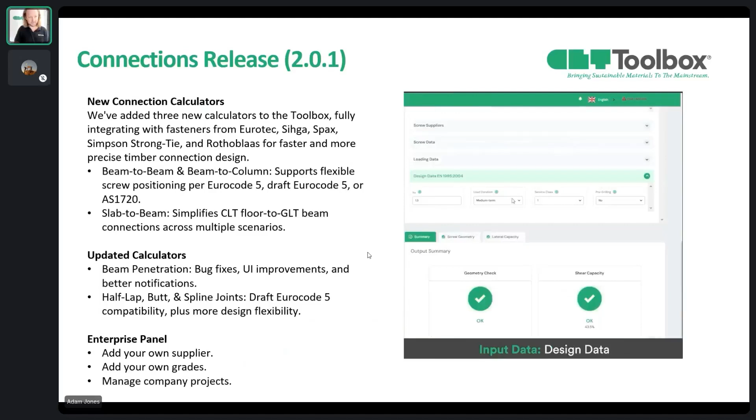So where I'd like to start is what's new in CLT Toolbox. As part of this webinar series, we're doing updates monthly, so we're going to run through that at just a very high level. So we've got new connection details: beam to beam connections, beam to column, basic screw connections, and slab to GLT beam connections. We updated our half lap, butt and spline joints to allow for continuous and discrete options.

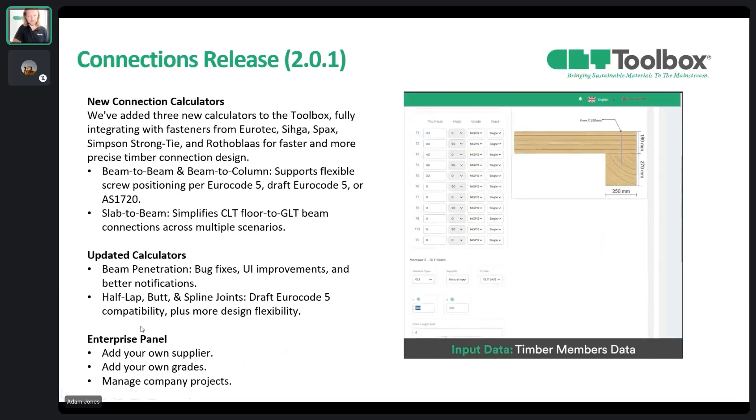And we've had the new Eurocode implemented as well, so you can choose AS1720, new Eurocode, current Eurocode, or the supplier ETAs. And we've also done add your supplier, add your own grades, and manage projects. So that was one release at the start of January. And then just this week, we've released the new wall calculator, column calculator, and beam calculator with a new UI. So that's 5 weeks into the year.

We've also got a new PDF engine. To be honest, that is a small step backwards in the short term, but in the long term, it means we're unlocked to do customizable PDFs. The PDF functionality is going to get much, much better, and we're going to have the ability to add comments on PDFs and things like that because we've moved to this new engine. It's just a small hit for 2 weeks; it still calculates and prints perfectly. It just doesn't look as great whilst we redo the designs and everything like that.

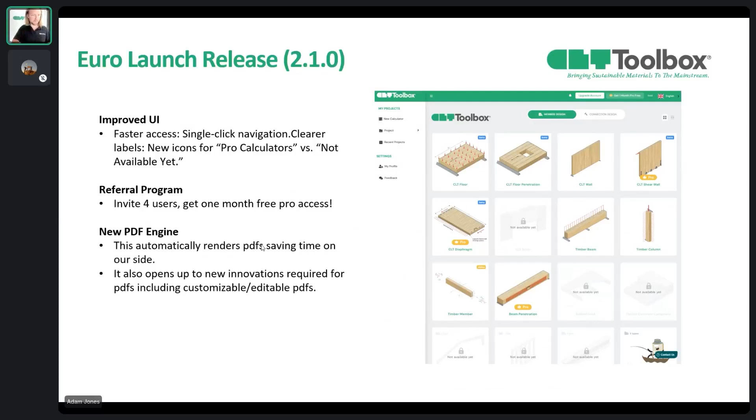And then within the next 3 releases, we're going to do upgrades to the 6 dowel calculators as simple connections. We're also releasing moment connections for dowels. You can see here the steel to CLT connection details are starting. So we have 3 teams. One is the connections team. The other is the members team.

For the members team, the biggest priority or the biggest gap in our platform right now is the analysis, basically. So having cantilevers, point loads, load superposition, stuff like that. CLT floor penetration, so you can dynamically move the hole in the CLT and it'll use the grillage method to design. TCC, rib decks and studs. And then features: I mentioned export, improving our PDFs and APIs as well.

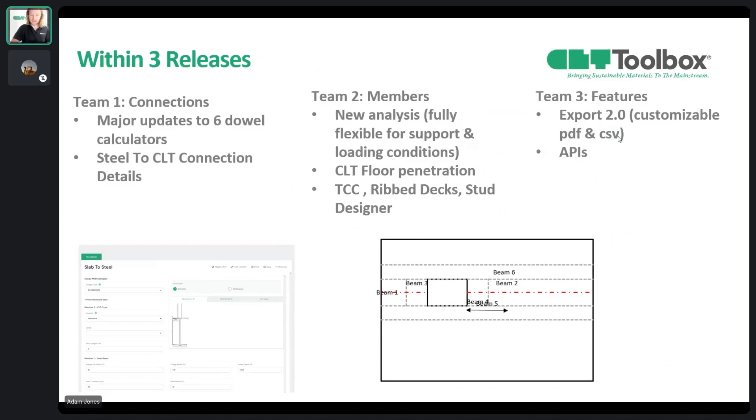All right, so today's webinar, we're going to be focusing on design of members for a post and beam office building. We are going to be using CLT Toolbox to design, but with any building, it's good to look at the big picture. I think sometimes optimizing a design for the wrong design isn't the right way to go about it. It's a bit like straightening deck chairs on the Titanic. The most important thing is to get the design principles right from the start and then fire up CLT Toolbox, or use CLT Toolbox to help get the right design principles.

So before we get into the design of the commercial office building, we've got 6 different principles. These will drive down the cost of the mass timber project and obviously be more competitive against concrete and steel, which we're all about. So one is, as much as we can, standardize as many parts as possible. From a manufacturing point of view, think about the Model T. The car industry was there before the Model T came along, and with that standardization from a factory point of view, it's much easier to drive throughput when there's that predictability, and better performance of factories drives down the costs of your building.

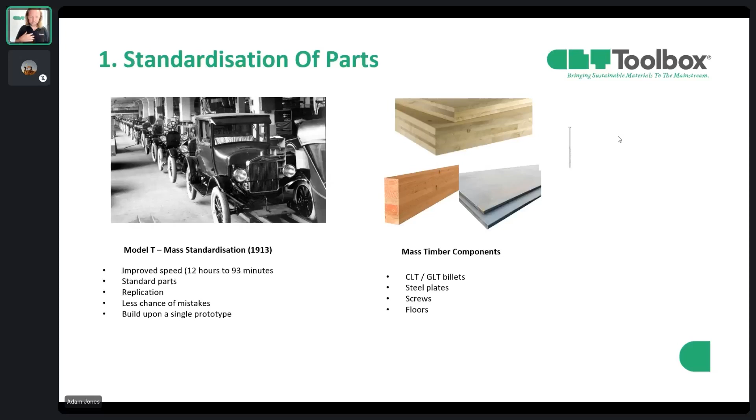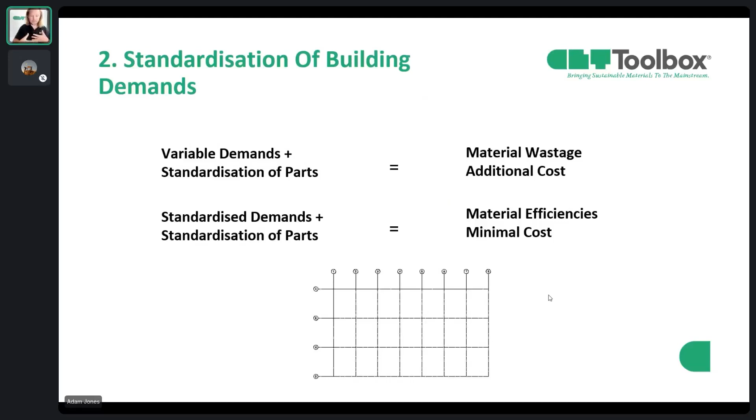So when it comes to mass timber, as much as possible, think about the billet sizes of CLT and GLT being consistent. Even steel plate thicknesses, where you can, try and be consistent. Screws, you might choose the same screw type and same diameter screws and then optimize on the spacing, and that's easier to install and things like that. And to go along with that, we can't really standardize parts within the building if we don't have standardized demands. So where we can, having consistency in grids and the actual utilization of our elements will go a long way for that.

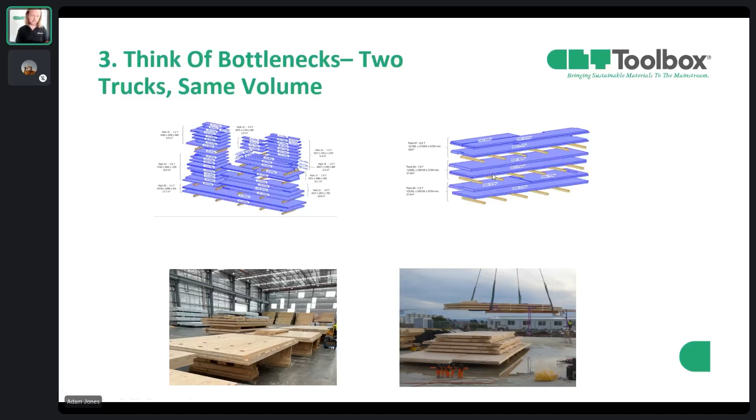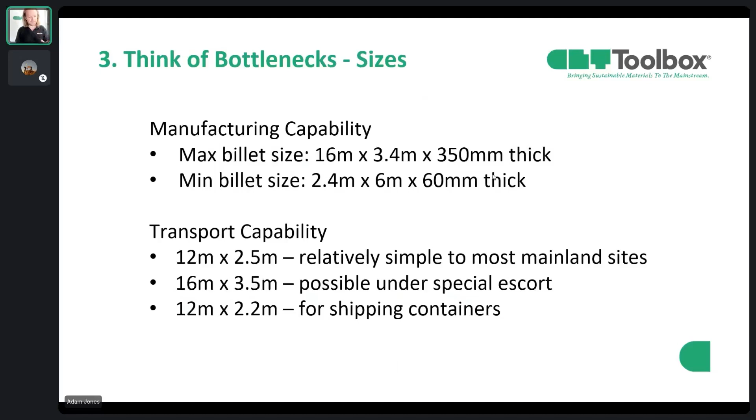And yeah, you compare it to this. So big parts is always better for everyone: manufacturers, installers, installation speeds and things like that. So where you can, think about that and where the bottlenecks are. So if size is a goal, what is the limiting factor to generate as big a size as possible? And typically it's the transport capabilities, and where you can, maybe upgrading the investment in this area might yield net benefit over a project.

And with that, the best people who know the bottlenecks of everything is, of course, the supply chain. So there's that challenge of do you keep that supply chain tension and not speak to a supplier. There's that train of thought, but the trade-offs of not engaging a specific supplier early are high. The mass timber industry in general is a very trustworthy bunch. No one's really going to squeeze you if you do lean into someone early, and you can get the benefits of knowing what they produce and designing in a certain way.

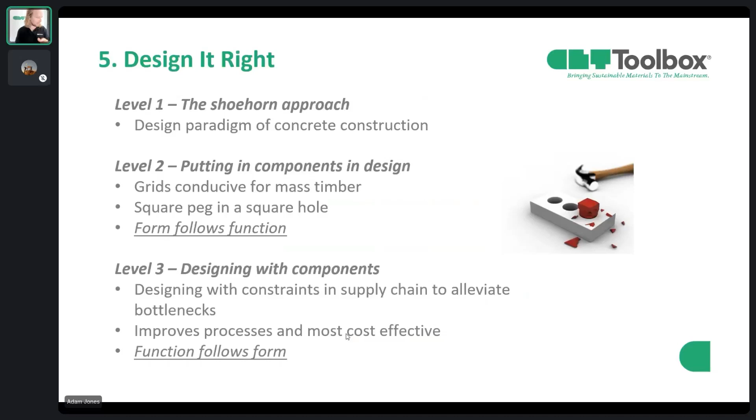Design it right. So when it comes to timber, the first time you get a project and you design in the paradigm of, say, concrete construction entirely and then try and shoehorn the mass timber option in, the project's going to be a disaster. And the whole project team will probably never come back to the timber option. But level 3 is understanding the throughput or the constraints of the supply chain, and then designing with that. Then you can get something that's more sustainable, better for humans with biophilia, and better for developers and builders from a cost point of view. And if you hit the triple bottom line, then it's an absolute no-brainer, and that's what can really drive the industry forward.

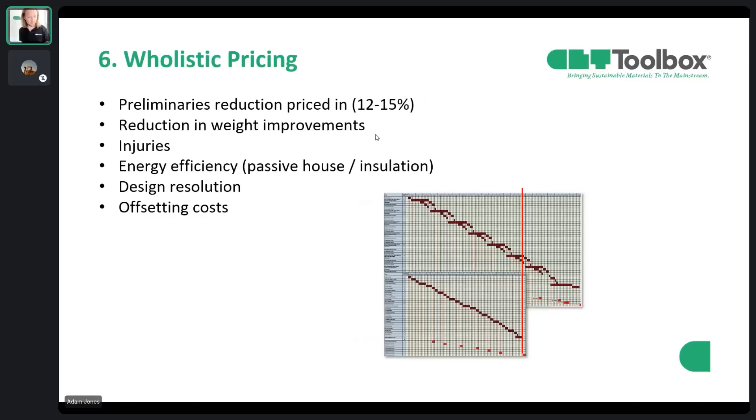My final one is holistic pricing. So we could actually capture the costs as best we can. Preliminaries reduction can be 12 to 15%, and build speeds can actually go up to 80% faster if you're not bottlenecked by any wet joints or anything else on site. So you can build much faster and get all the benefits that go with that.

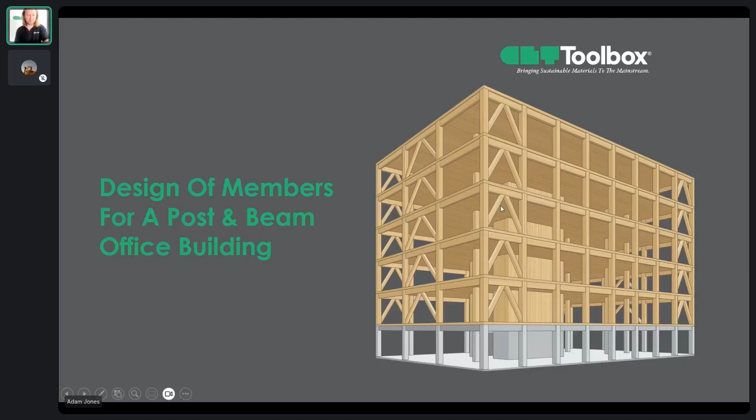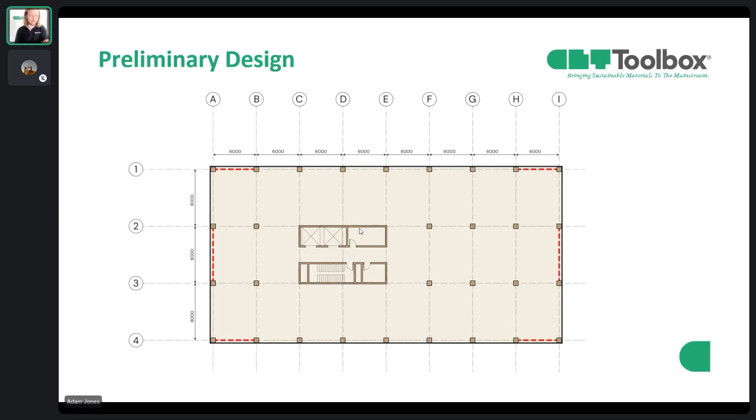All right. So that's a bit of a preamble before we get into the design of a commercial post and beam office building. This is a pretty perfect design from an engineering point of view. Obviously, the real world is a bit messier. Looking at the grids, we've got, say, 6 meter by 8 meter grids, a centralized core, and the dotted lines here meaning your lateral K-bracing. In this webinar, we're going to do the basic member design based on the new calculators on the platform. In the next webinar, we will look at lateral stability and connection details. And time permitting, I might give you a sneak peek at some of the connection details as a teaser. All right, so let's get into it.

So we're going to start with a CLT floor design based on the following parameters, and we're going to look at different vibration methods and the impacts of it.

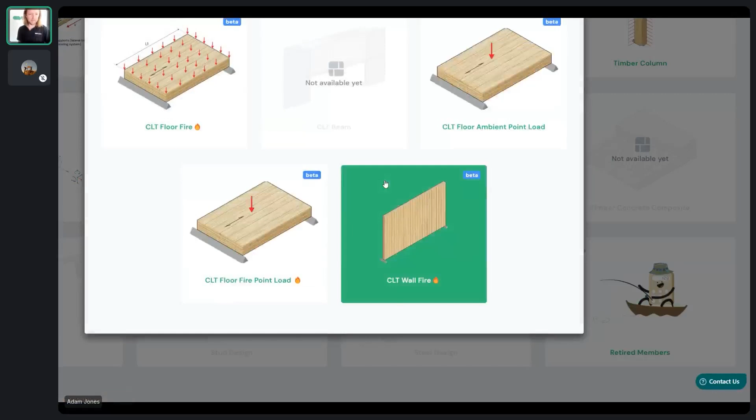So they've gone fishing, some of our initial calculators. We were big fans of them. You've probably seen them before, but these are still working. You can still access your old saved calculators, but it just means something better and younger has come through and is a bit more versatile and a bit more athletic. Hence, it's got the pole position on the platform.

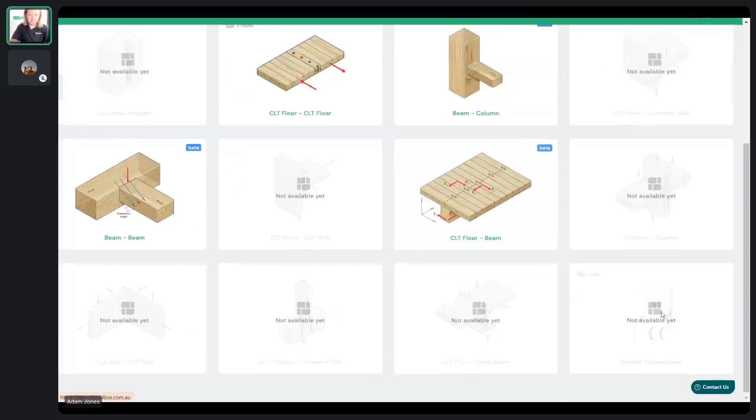So for new project scope, you've got personal, or if you're in an enterprise account, you can actually put it towards a project team that everyone in your company can see. So our enterprise customers have that option. Put in your project name. Group is for level 1, level 2, things like that. Then the title of your calculator.

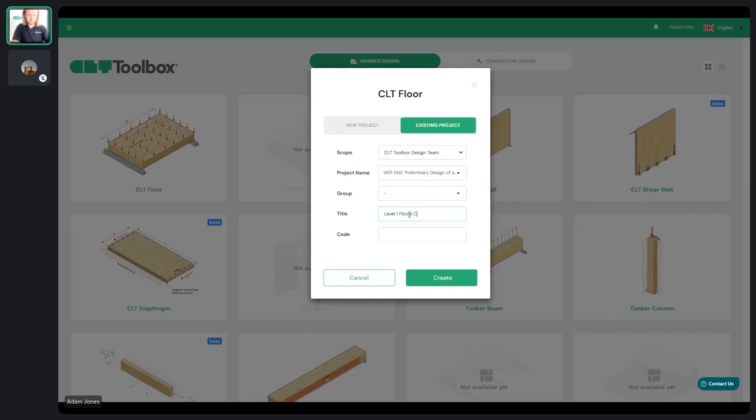We're going to go an existing design team. There's something I've created before, but I'll go a new floor calculator. Again, you can choose the levels, things like that. But let's just go level 1 floors calculation. All right.

Cool. So as it's populating here, you can see you've firstly got manual input and you've got the range of grades. So you can design everything from first principles. You can do single stack, double stack, everything like that. You can design with your supply chain partners. On top of that, in the new enterprise panel, you can add and configure your own suppliers. I'm going to show you a bit about that at the end.

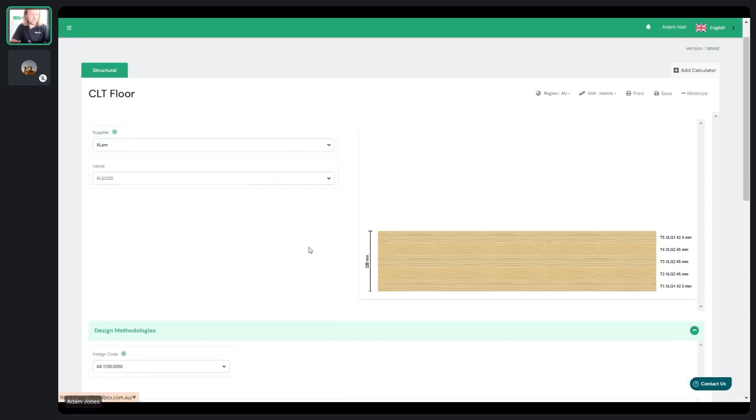But yeah, so firstly, you can choose your suppliers. So let's say XLam is one option. And if you want to speak to the suppliers, you've always got the contact details there about who to chat with. I think Rob's left now, so we're going to get Jordan's name in there. Go through, you've got your design codes to design with, your loading data. If you haven't seen the latest version of the app, we have added additional load cases.

So as you add in wind load or snow load, you can see these loads populate, and then the default load combinations also populate. So let's just go dead and live. We've got our default load combinations, manual input forces. Moving through, you've got things like your self-weight considered, topping, and then your loads. For us, there's a 1.5 kPa SDL plus a 3 kPa live load, so we don't need to change that.

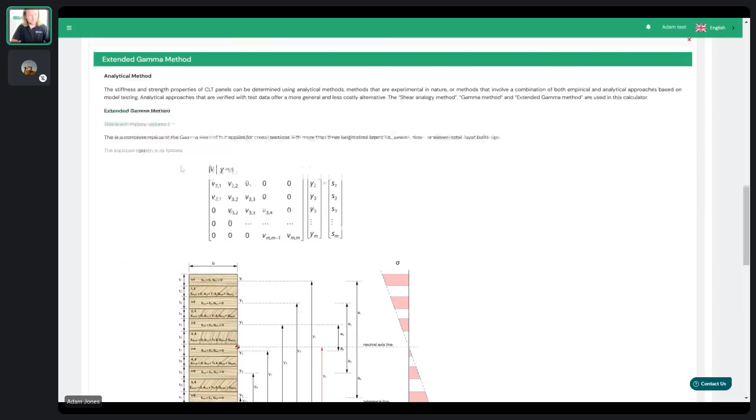Other things, you've got your different analytical methods. So extended gamma being powerful, allowable for any cross-section, shear analogy accounting for shear deformation and things like that. A lot of you have probably been on this platform before and are aware of this, but if you're not, you can always just go through the educational features and learn and understand what the best method to choose is.

Got your design, K-factors, and then your deflection data, and then our vibration method. So you can see here the vibration a lot of the time is what governs the design. Right now, we've got the new ability to add in the revised Eurocode, and this is probably the most advanced vibration method and allows some new things.

So firstly, if you click the drop down, you can learn about the floor performance levels. We can improve this table a little bit, but you can see that for the office option, you've got the quality choice of level 1, 2, 3, all the way through to the economic choice through 5. And that's based on a different response factor for each floor performance level.

And you can see here, as we go to level 1, it doesn't work, but you can go to your client and negotiate with them what's the actual level we're choosing, and as you fine tune that, you can actually get the costs right from a mass timber supplier point of view.

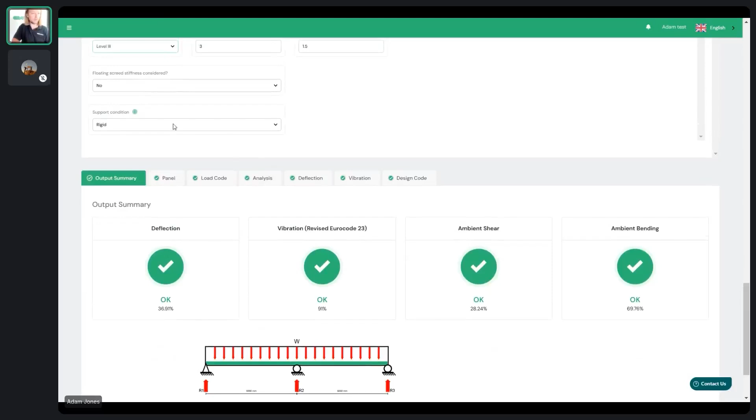It's also got flexible supports or rigid, and that means you've got supporting beams contributing to it, so it's working as a system. So you can input your beams, and as we design our beams, you can come back in and update the stiffness there, assuming we were to be flexible or rigid. All right, so you can see the calculations based on what we chose there. We can easily, again, change our suppliers, change our layups, and get the most efficient. So for us, we're a 5-layer.

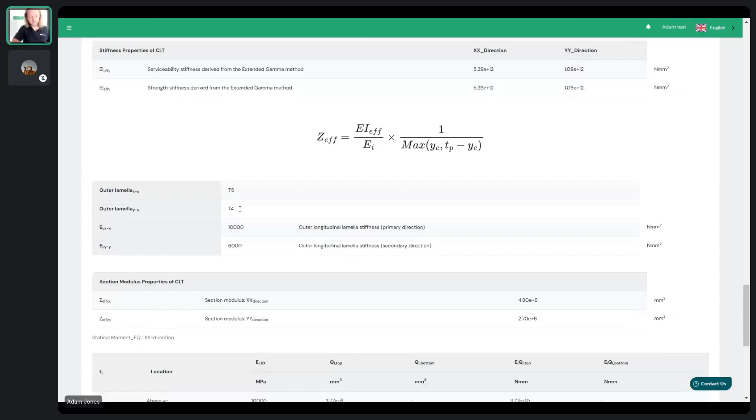If you were speaking to the client, if you had to have more stringent vibration requirements, you can see here, as we get to 7 layers, you can expect a higher cost. So you could sit down with the client and say, look, if we have this vibration criteria, then we can get away with a 5-layer panel and not have to lay up 7 layers in the factory and save costs and things like that. All right, so going through, you've got all your different calculations in detail here.

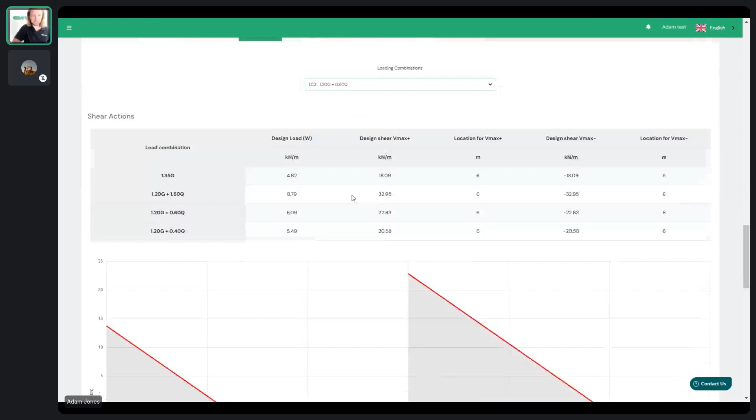You've got your loading combinations, so here for dead and live, but as I mentioned before, as you add in snow or wind or whatever, all of these now update to be the default load combinations to match the scenario. And that's been in the last month or so. You've got your different loading combinations, so bending moment. And I mentioned the new analysis is coming in to give you that extra power there. And then vibration as well.

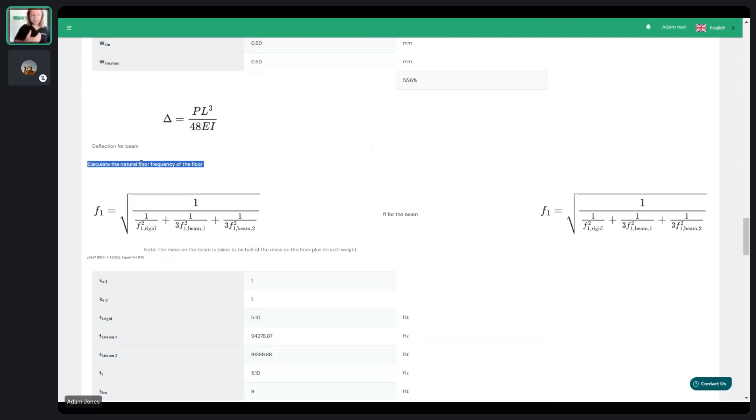You can look at it in detail. You can follow the specifics of it all. You've got the natural frequencies, and this is dynamic. So the calculations go deep and detailed because vibration is the critical factor. It is okay to go in this circumstance, but you can see here as you go with flexible support, it does update dynamically based on the conditions. And for us, that's where a lot of the time goes, changing all those modules that we have based on the scenario of what the user chooses.

So going through, you've got your design, and at the end, you can hit save, and we've designed our XLAM panel. All right, so that's a CLT. At the end, I'm going to design it for fire, because we've got a new fire module in progress. It's just about to be released. It's taken us about 12 months to get there.

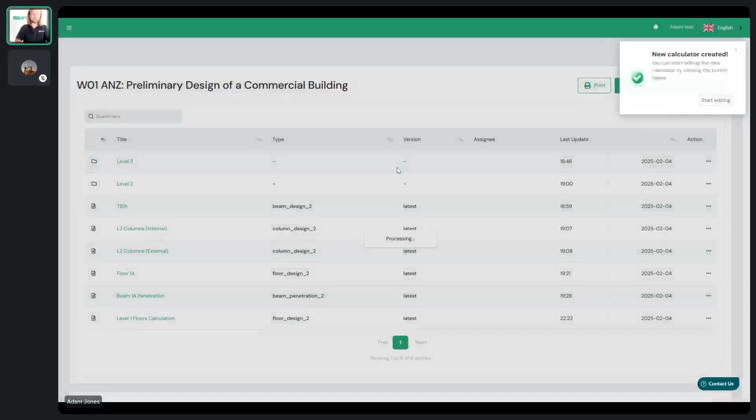All right, so next we're going to design a beam. So I've gotten a little bit messy here, but let's just start a new calculator. It's now called a timber beam. It'll make sense why soon. So, floor 1 beam, something like that. So here you can start the calculations from this level, and maybe at the end I'll show you a few more things at the project level that sometimes get missed. So here we've got GLT. This is our new timber beam calculator released on Monday.

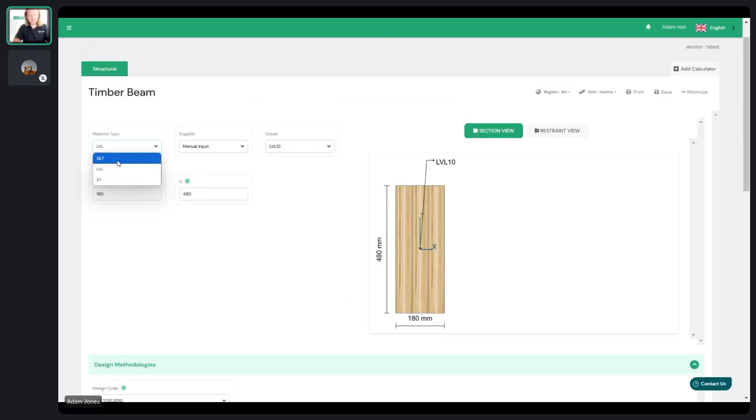Why it's exciting is because now you've got GLT, LVL and sawn timber as well. So it just shows over time we are incorporating more and more of the broader categories within the supply chain. And again, you've got the different designers here. So in this case, you can design for Australia, local, European supply chain, whatever it might be. So we can start populating our beam, knowing we're going to design penetrations later. You might start with your penos and work back.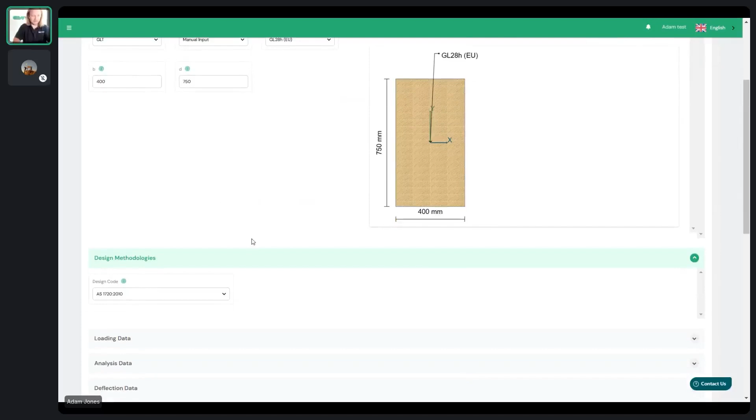For our design code, we might design to Eurocode in this instance, so 750 by 400. We can go back and optimize. For this case, you've got your same outputs, your dead loads and your live loads. I think we had 15 here and 18 for the loading, whatever it might be. Analysis data for us, it's a 9-meter span. For the beam, we've got explicit shear deformation calculations in there right now.

So for CLT, it's captured in the shear analogy method, but here it's an explicit drop down. And sometimes that is the difference. Shear deformation is actually not always covered at all. It's sometimes considered in the too hard basket. So if you're doing a holistic design, it's something to consider.

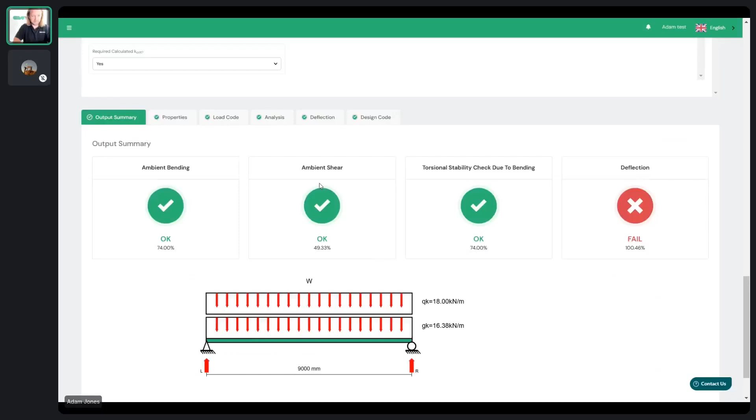So output summary, again, got all the loads, everything like that. So if you've been on the platform before or designed the CLT floor, it's working in the exact same way. So I won't need to go through this in too much more detail, but again, you've got all the load combinations based on what was designed for in the Eurocode.

So let's save our. Well, actually, I didn't get that working. So let's go 450, and reason being an FRL, which we're not designing for today. We will in the next webinar, of 120. And you usually want to match the breadth of the beams to the column breadth. So you probably have a 450 column, hence you might play with the breadth rather than the depth, but different ways of skinning the cat, of course. So right there, we designed a beam.

Next, we've got our internal column design. So we're going to design 2 columns today, an internal one and an external one, based on those forces put on the platform. So this is also a new calculator. So if I go timber column, and again, I should put this into groups as you build it. So level 2, level 3, that's probably your best practice on how to do this. And we're building our calculator.

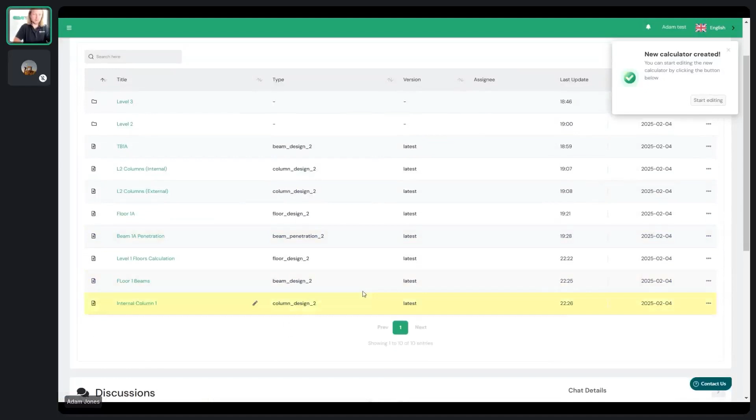So other things here, as you're populating the project, you can assign the task. If you've got multiple people on it, you can add all the calculators for the project, assign them to your team, and then build it that way. And then you could say, hey, everyone, please refer to assigned tasks. So that way you can actually do collaboration. And that's how users are currently using collaboration features at the moment, when you have shared projects, or as I mentioned before, at the enterprise, at the customer level, at the project level.

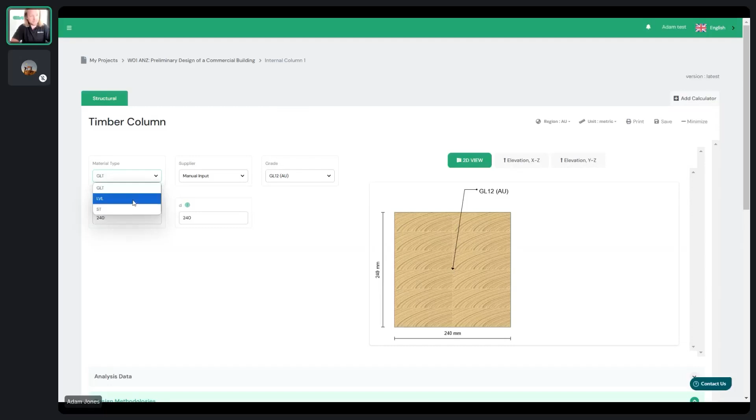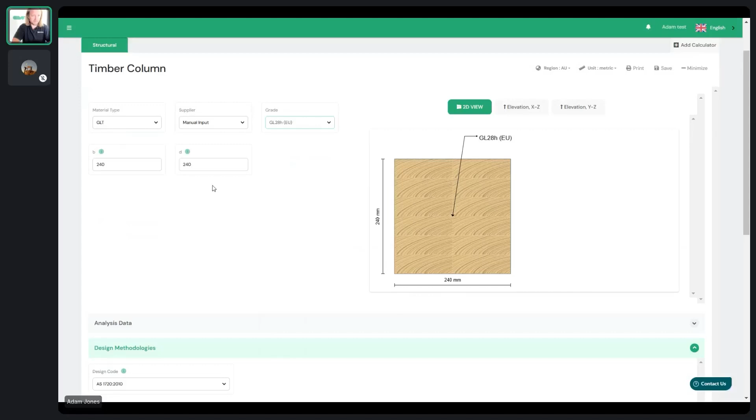So material type, again, a bit like before, GLT, LVL, we've got edgewise, flatwise, or both. So we do take into account for biaxial bending the properties in both directions of LVL. That's one of the things. I know other software doesn't capture that. They just put in one load of properties. So that's something to keep in mind. So for us to match the GLT we mentioned before, I think I said GL28h EU, 450, 450. So you can see the dimensions being populated here.

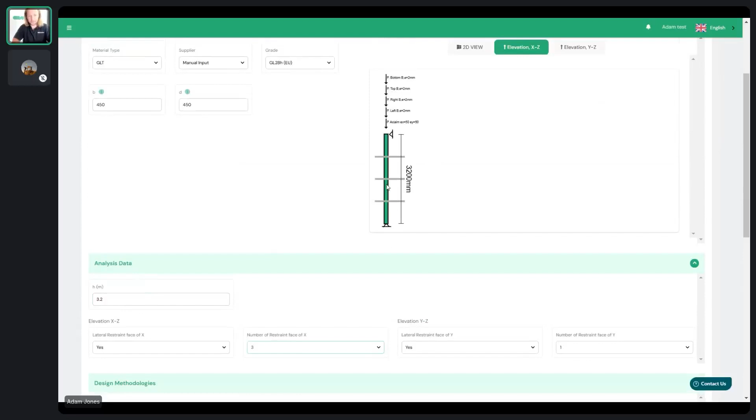With the new elements, you've got a basic structural drawing essentially of what is being designed in both elevations. So again, simple screenshots you can work with for that. For us, you've got the height, say 3.5 meters, maybe 3.2 or something. For lateral restraints, again, you can go multiple restraints. So you can see here, we've got multiple restraints. In our context, we don't need them, but you turn it yes and no, and then you've actually got your elevation and everything being designed like that. Again, you've got your Eurocode design in this instance. I showed you AS 1720 before. Dead and live in this case, you've got your self-weight considered, service class, category of office locations.

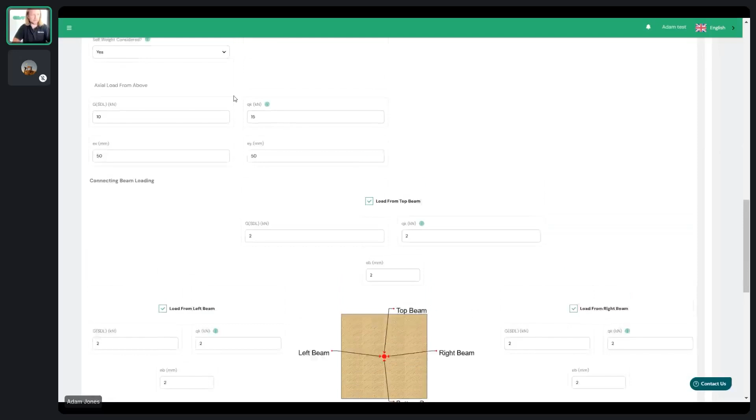And then this is a new part as well. So the axial load above, we've got 648 and 720. Soon we're going to have a drop down for the eccentricity, but to be honest, that's the sort of thing you could post in the community forum, when it's not explicit what eccentricities are a good assumption for your axial load above, you know what I mean? So feel free for someone to post that in the forum or a comment, because they're the things where we obviously don't know everything in our team. We're really good at devouring standards and design guides, but sometimes there's nuance that's not always captured.

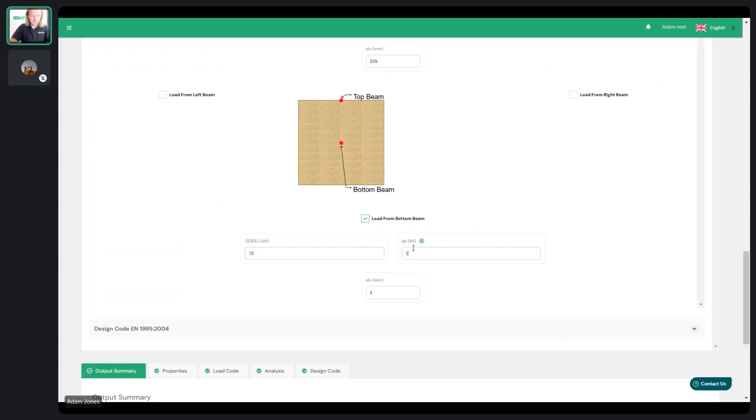So you can simply just turn your connecting beams on or off, and you've got an arrow here to show where the eccentricity is of that connecting beam. So right now, you can connect the beam here and do the loading of 72 and 60. And because it's balanced, it's going to be both sides. And you can obviously play with that as much as you like to try and find a critical case. All right, so that's a beam connecting above and below, as is the internal column here.

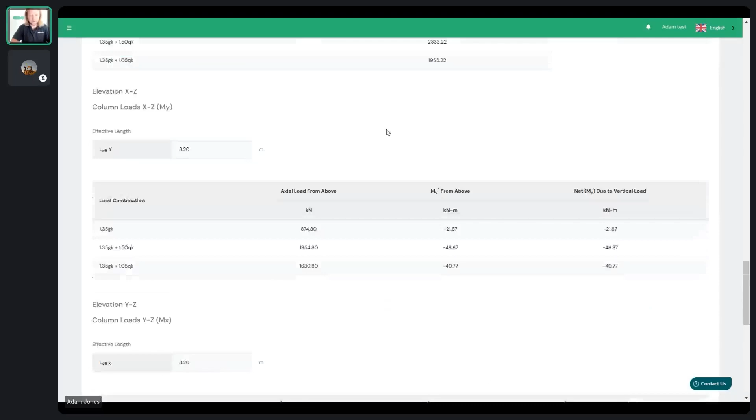Next, you've got your design factors, design data, and you can see all the calculations here based on the Eurocode. You've got your properties, loading combinations, and analysis. So for the analysis now, you've got axial force and bending moment diagrams based on the column, and then in-depth calculations. So we obviously go really deep in detail with all the calculations. Some of the collateral damage of that is the output summary could be simpler. So we are adding a one-page summary that's going to be better at just giving you the very high level one-page PDF type summary, and that way you're not sending a 30-page PDF per calculator to certifiers, which nobody wants.

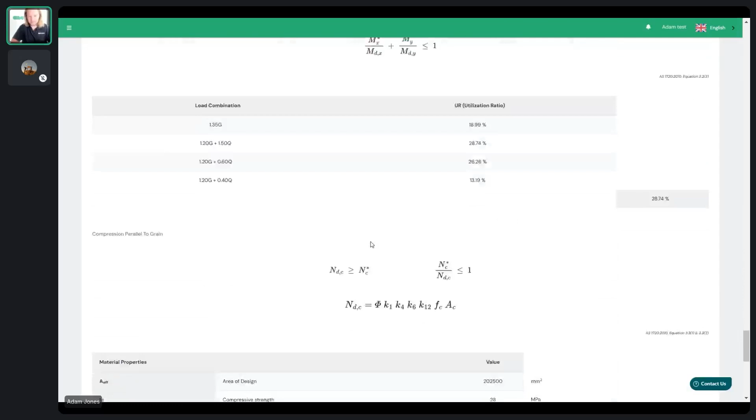Yeah, like with everything on our platform, it's dynamic based on what you choose. So if you go to design code now, just as it's loading, you've got all of your Australian standards design. So it's modular. It's really straightforward to see what the differences are. In this case, if it was the Australian standards, you can see here we've got a more elaborated K-12 calculation.

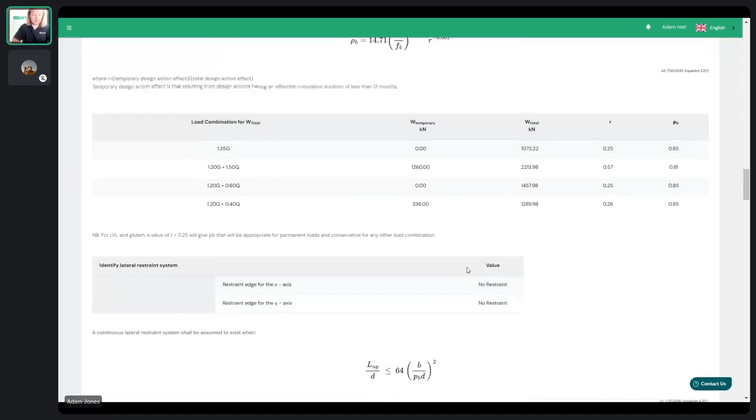And for K-12, we calculate it separately for bending and compression. So two separate K-12 calculations that go into detail. I think on the previous versions, we just had one type of K-12, hence the old-fashioned retired calculator. So I'll put this back onto where we were and save the calculator.

All right, cool. Next, we're going to do an external column design. So this is the design we just did, but now with the external column design, we can simply duplicate it, go external column 1, hit save.

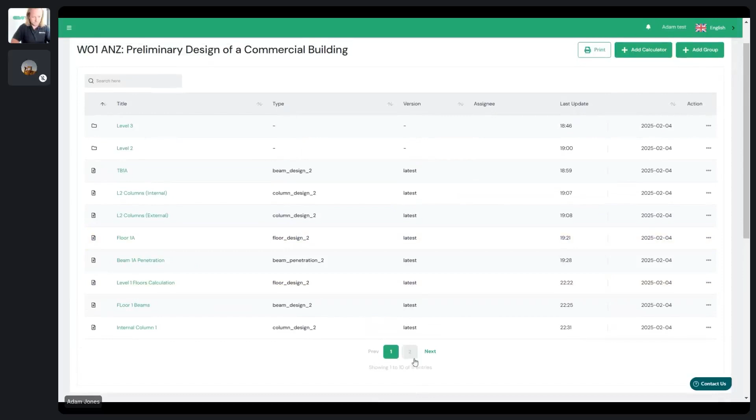Oh, thought I lost it for a second. It's on the next page. Thank God. It's always very early days in the software. There were a lot more little things that happened unexpectedly, but good news is that's sort of on its way out.

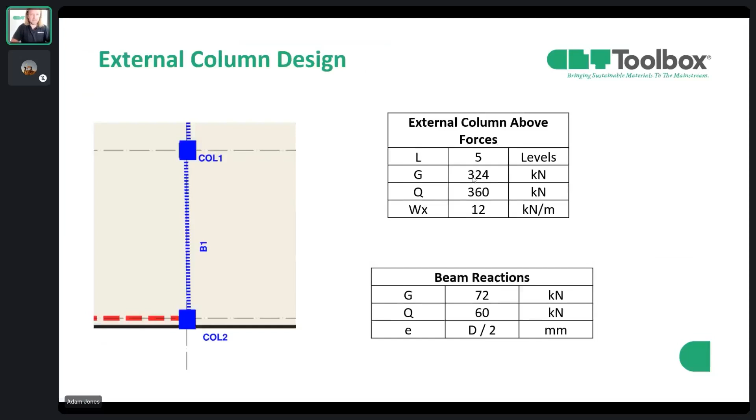So you can see the same data presented before. The only difference here is we've only got load from the top beam. You might have more of an unbalanced moment in this case, but you've got less load. And not always this will be connected to your lateral system. Sorry, that was the other way around. I meant to go 72 and 60 here, and the load above was 324 and 360.

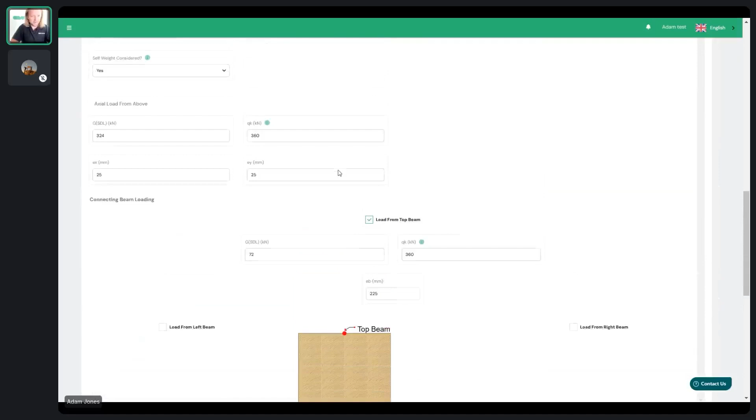And you'd expect, well, buckling, it's currently failing right now, which is interesting. So you'd obviously have to upgrade the size and things like that. So the other load case that we've got here is the wind combination. So you wouldn't have wind from the load above, but if you were to connect it on that actual floor, right now you can put it in as a load.

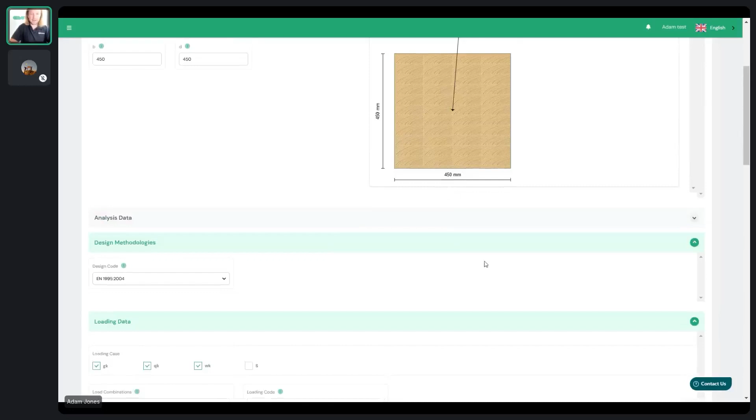So for one direction, whether it be 6 kilonewtons per meter, whatever it might be, you can see our elevation view updating based on the actual lateral load. So 0 in this elevation, 6 kilonewtons per meter in the alternative elevation. And when you go into your loading combinations, all of this is picked up based on the combination selected. And then also in the analysis, you can see how it's working.

So for the wind combination, as you'd expect, it's more of a bending moment diagram that looks like this based on all the scenarios that pop up. All right, so that's a column and demonstrating the duplicate calculator. Another one, of course, is a beam penetration calculator. This can happen deeper in projects, and it's a lot of time that goes into this. We've gone through a lot of iterations improving this ourselves.

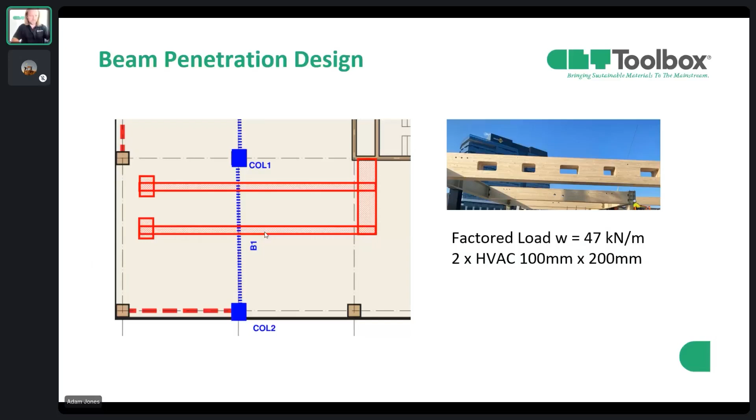But let's imagine we've got a couple of HVACs hitting our beam, so to speak. So go to beam penetration. So beam 1A penetration. And we can load it up. You could obviously create the calculators from the front view as well. So for the penetration, this is quite similar to the one I created. I actually saved this exact calculator earlier preparing for this, but you can see the penetrations.

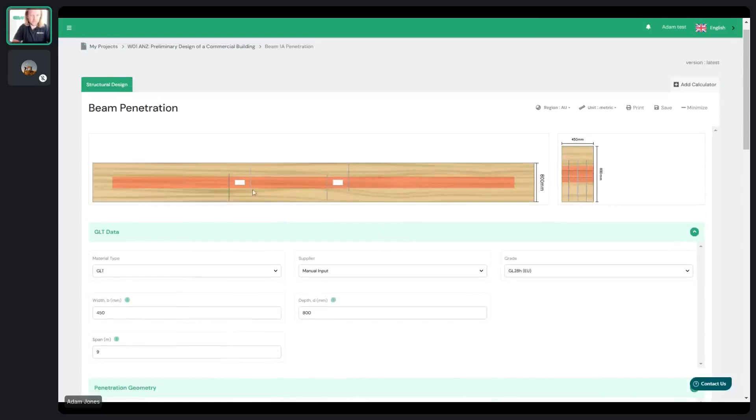You've got a number of penetrations. So as you go through, you can change the number from 3 to 2 to 5 and so forth. And it's quite easy to work with your mechanical services provider for the project to negotiate with them about how to deal with your penos. Now we've got multiple. So for us, say with our depth of 450 by 750, you can do your reinforcement.

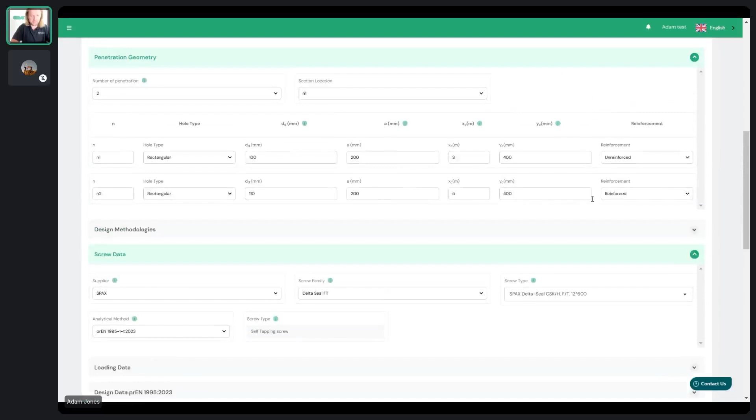So you can make them both unreinforced or reinforced. So for us, we can see it is working right now based on the location of it. Let's see what happens if we unreinforce the second penetration. It is still working, but telling us to use a fully threaded screw. So that's the penetration geometry. Some other checks. This is based on the new Eurocode 5.

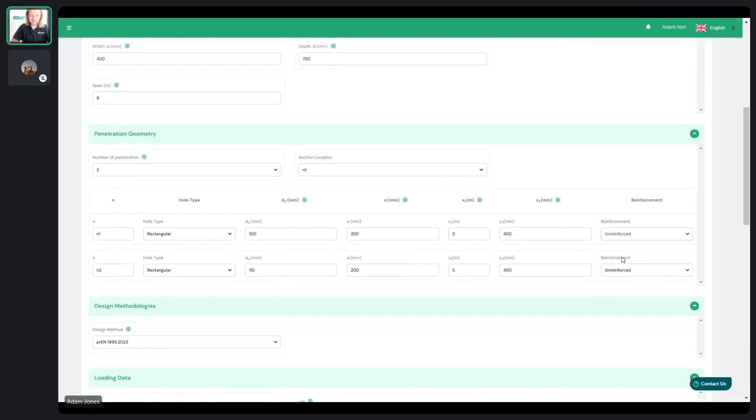And then you've got your loads. So for us, we had 47 kilonewtons per meter loading. And then you've got your different service classes. So that's based on an unreinforced penetration. But let's say if we were to reinforce it, we've got the ability to choose your supplier here. So you've got SPAX. I know is on the call.

So with SPAX, you can say, all right, if they're our supplier, you can go through their available screw types. So you've got all the screws here available, fully threaded, partially threaded, service classes available and everything like that. And then you can choose the screw type that matches the scenario. And if you were to change your supplier, it is as easy as a click of a button.

So HBS, VGZ, again, quickly learn about the actual screw families of every supplier and design with what's available. So I'm going to just keep it like this for SPAX. So I'm sure everything works, but yeah. So you can easily go around, get to the right. So the Würth, fully threaded, sorry. But yeah, you can see that, I guess it's been made easy.

The other thing is you can design to the ETA or the draft Eurocode, and it has the smarts there to actually give you information on the pre-drilling required, because obviously that impacts the calculations, but the draft Eurocode may not impact the calcs in that instance. So that gives you that flexibility and ability. All right, so K factors and then reinforcement data. So if we go 2 or 3, it all dynamically updates based on what's selected.

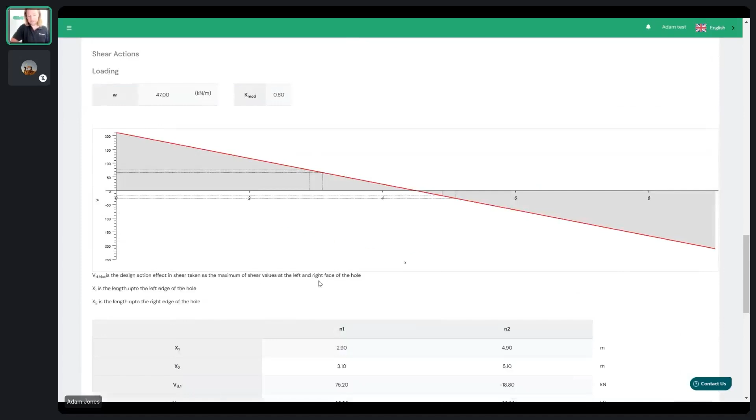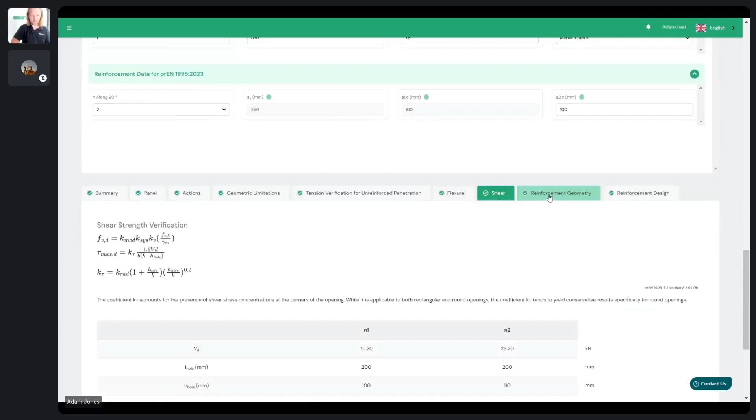So with that at the high level, you can look at it, but all the calculations, again, not a black box. So it's good for us because we build confidence in our platform, and if there is ever something that doesn't look right, people see it straight away and let us know. We've also implemented green or red, so when there's so many checks, you can tell straight away where the issue is in terms of a design. And tension verification, so this is the unreinforced penetration, flexural, shear, and again, reinforcement geometry checks. It's based on the ETAs or the design code method selected.

And one of the things about designing with ETAs is sometimes that simple click of a button might get you that improved performance of that supplier. And with that, for a big project, you might save 10% on screws because you actually chose a better method. And that might save you $20,000 or something. So if you think about trying to get big wins for your client as fast as you can, designing screws as best you can is one way of doing it.

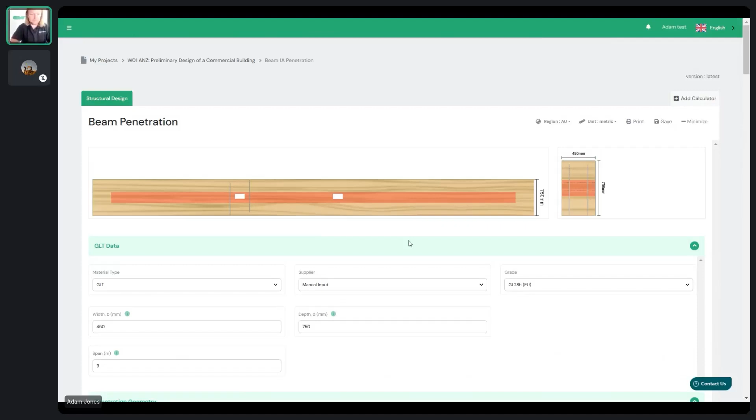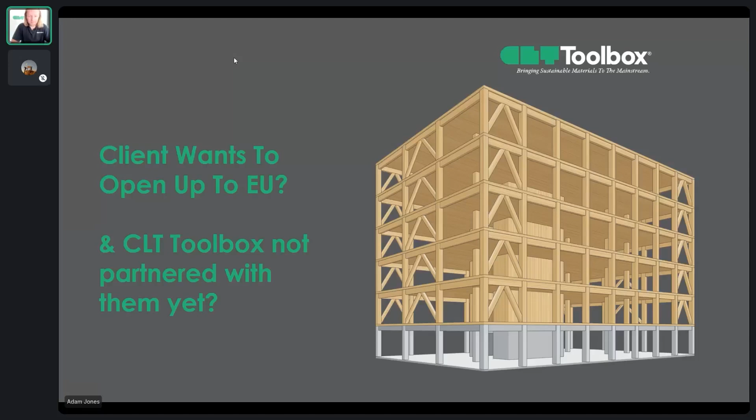All right, where are we at? So that's a few of the most recent calculators. I'm going to go through a few random different scenarios that could pop up here. But what happens if there's another supplier that we haven't partnered with on the CLT Toolbox platform? So this is a new feature available to enterprise customers; they've now got the ability to have this suppliers tab. And in this, what you can do is add your own supplier now.

So you can see here in blue, the light color, this is what the CLT Toolbox enterprise account has built, just some random ones. You can see some of the demos we've had here, Stora being an example. They've got calculators. They don't really like us because we're building this probably, but you could put any data you want on the platform basically. So with that, you can add your own grades from first principles and get in the properties, whatever it might be. But most of the time we've already got the grades on our side.

You click add supplier, webinar, let's go Smart. Smart LAM, maybe. We caught up with SmartLam this morning, hence they're probably top of mind. Target region, let's say it's Australia. Let's say they're from origin region. You can go to the origin region, and you can do this for GLT. You can do it for LVL. You can do it for anything you want, basically. So let's just do a save as a test.

Smart LAM. Edit supplier, or you can do layups. Let's just add a layup in. 90. Oh, that's a weird one. Let's go 45, 45, 45, 45, 45. Just put in anything here for width. Doesn't really impact the calcs, to be honest, because we manually input that for the shear wall calculator. CL5, 225, grade. Let's go C24.

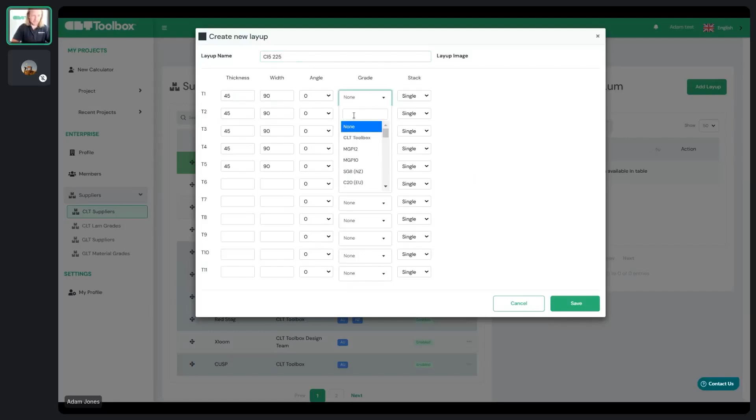And you can see it being built up. So we're just building a CLT, any CLT in the world you've got now, and you can add them in for later layups. So even for mass timber suppliers, it could be really cool from an R&D point of view. When I was working at XLAM, this would be amazing to just see what's the most efficient layups that we can think of, and see what the implications are in design, what are the savings and everything like that.

So there we have it. So we've got the details right there. We've got SmartLam, you can edit supplier, you can put in details yourself, everything like that. But let's go back to our company project. And we want to see what the impact of having this supplier is. So let's go back to here.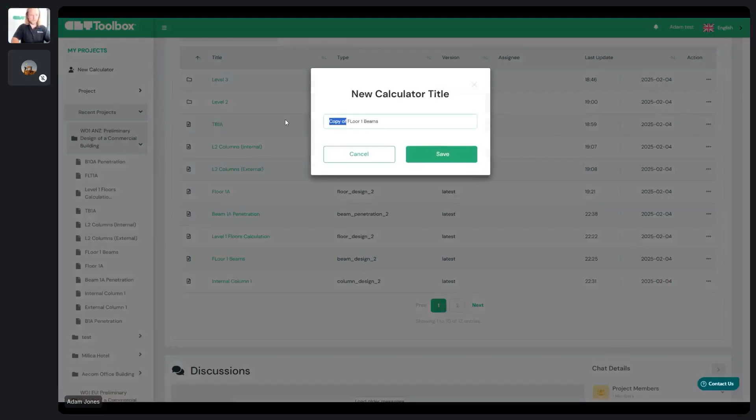We've got the floor, which, what's today's date? I think this is registering yesterday's time, but let's duplicate this. Let's go new. What did I press then? Sorry, I don't know where that went. Let's go new EU. CLT. Duplicate new EU floor supplier, whatever it might be. Calculation duplicated, and then we go to our EU option.

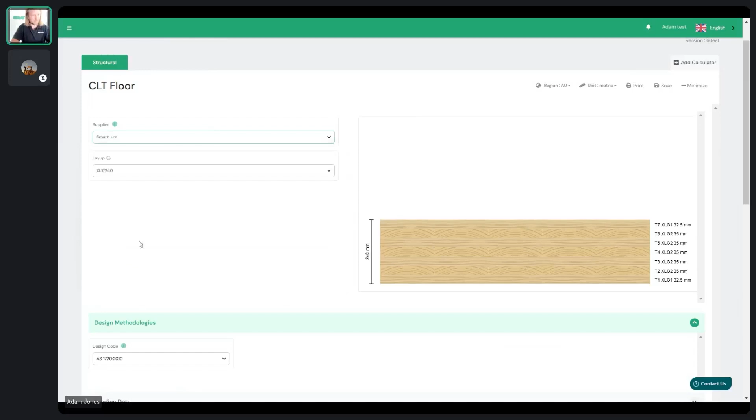We designed for AS1720 before. And where is it? SmartLam, there we go. Got SmartLam, got the EU. Again, choose the design code, and then it's going to be designed based on everything. For our vibration, we're on the Hamm method. Go revised Eurocode, level 4, and it's working. So that's one of those things. So it just gives you that. Same with LVL, you might want to keep on the platform, whatever it might be.

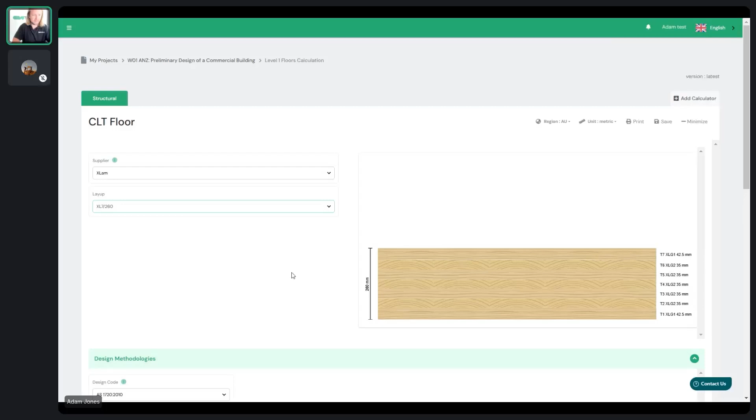All right, so we've probably got time to just give you a sneak peek of some new things on the app. This is coming next, and it's really exciting. So where's the best place to do this? So this is available for me as an alpha calculator and testing. If anyone really wants to be part of our testing, just let us know. We could probably give you the alpha tag as well. It just needs to be known it's not in a stable environment. But add calculator. So this is where it's going to be able to share the data. So, please forgive me, I'm going to go to the dev environment just because it demonstrates it more fully.

All right, so we've got multiple branches. So the way that software works, basically, you've got little twigs, which is like one software developer's work. Then you've got branches, then big branches, and then it's trunks. And it goes from the most outer twig and branch, and then it keeps getting pushed into an app release, which is like the trunk. Hence, I'm going further out than where the tree trunk is right now, just to show you the latest version. It's a bit more unstable, but it's more advanced.

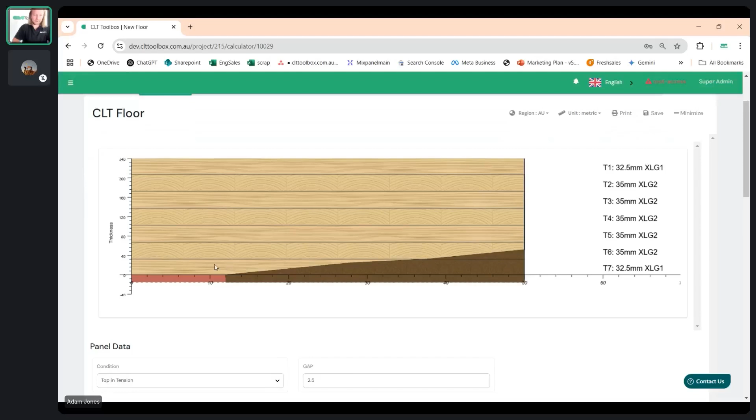So let's get our design going. So same as before, you've got all the design checks from a non-fire point of view. But now all you're going to do is add the fire scenario. There's a lot of calculations, so this just does take a little bit longer to load up. Yep, you can see it here. So right now it's all speaking to each other in the right way. So for us, let's just do our FRL of 90 minutes. For char rates, you've got the calculations in Eurocode, or you can do manual input. You've got the ability, like before, to do glue line integrity, things like that. So this is in, so you can see that working.

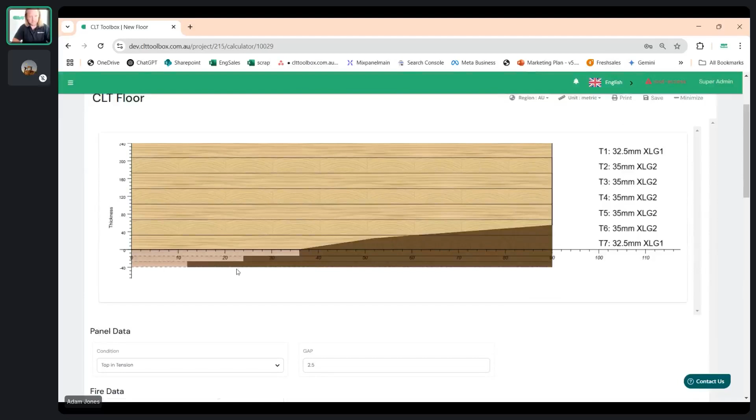But probably the most exciting is you can actually add as many layers as you want. And based on fire tests, you might, for example, have whatever the protection layers are. You can do screed on top. You can do whatever it is. So you've got insulation as an option. When it gets pushed to app, it'll have mineral wool insulation, everything like that. And you're actually building up your layups dynamically. And that means you've got your acoustic system contributing to the fire, which is the reality a lot of the time. And then when you go to the calculations, it just reruns it all.

So you've got charring calculations in detail. You get the end of fire cross-section to recalculate the panel properties. So you can see here, it's designing based on a 5-layer panel in between, so 1, 2, 5. So it just recalculates it based on the new sizes. It does the loading combinations based on the fire case.

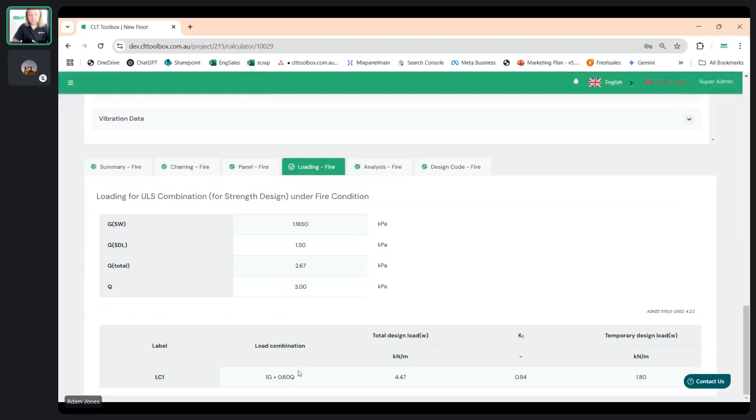It does the analysis based on the fire case, and then it redoes the design based on the fire case. So it is really comprehensive, and the good news is you don't have to. You can share data across the non-fire and fire case right now, and easily see what's governing. In our scenario, vibration's governing.

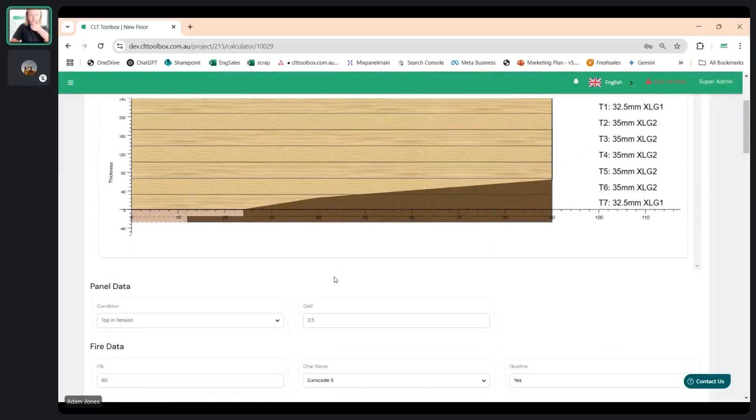But you could easily imagine, hopefully this works on the fly, it's on the dev environment, but you could easily imagine if you reduce your fire layers as such, change the FRL to 120, whatever it might be, that balance, after the zero strength layer, it probably gets closer to a 3-layer panel. It's still working right now.

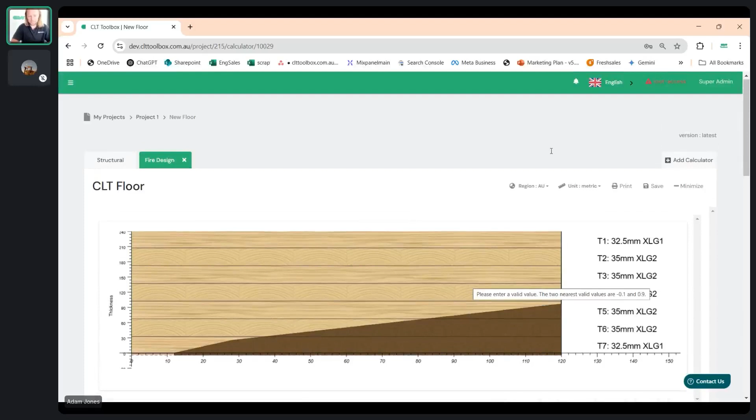Actually, because it's on protection time. So yeah, you can manually input your protection time of each layer, or you can calculate each layer. So with that, now it's a 3-layer panel, and you can just follow how much is burned through. Right now, it's still working. So that's still in dev, but once that's going through, you can easily balance the design from both scenarios.

Great. Well, for the final step in this demo, I might just show quickly the wall calculator. That won't be in the next webinar, but I've showed you the new beam, the new column, the new floor, and the new wall calculator, again, save it to whatever project you want.

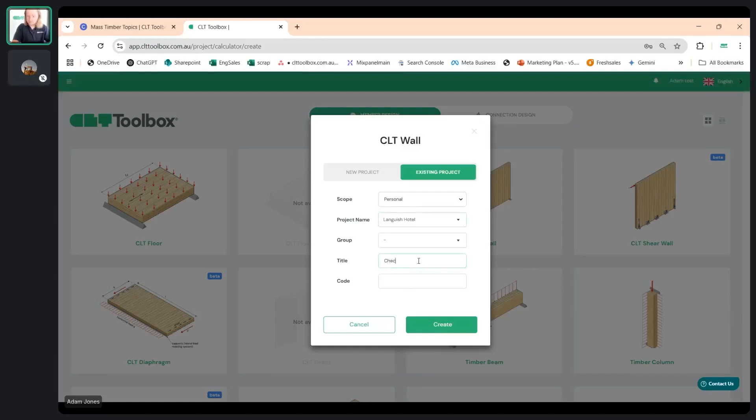Let's go Languish Hotel. I wonder, that must have been not a good day whenever I came up with that project name, but anyway, let's design Languish Hotel.

With this design, you can see again, you've got basic cross sections now every time, so it's a much more powerful calculator, I'd say. Again, design codes, analysis, similar to before, you got framing of platform or balloon. But now what we didn't have, you got wind, so you can do out-of-plane wind loads, whatever it might be. Eccentricities, you got manual input, but now we've built in the revised Eurocode. So this is what governs the design of walls a lot of the time.

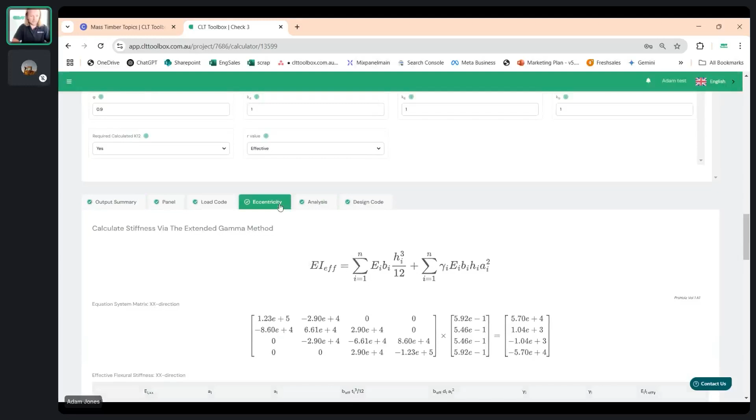And again, you can always go through and learn from it. We are building in CSA, Canada, and USA eccentricity methods as well, similar to vibration, because it does govern more than you'd expect. So for us, we put in the wind. You can put in the load there, and then go through the calculations as such. So that's just a quick sneak peek at the wall calculator, but we might leave it there, and I'm going to stop sharing now because I know it goes weird otherwise.

And good to see you there, Ringo. You're always nervous when you stop sharing that you've been presenting the whole time, but your internet dropped out. That's happened to me twice in the webinar context. No, woo! Well done, man. That was awesome. We actually did get a few questions, so we will get a chance to go through them. But I'll open by saying, Languish Hotel doesn't sound like a particularly pleasant place to stay. It's really when the release is going late, I guess. When I was doing the final testing, up late at night.

I'll also open by saying Jason McCall with the awesome last name said that the beam penetration calculator would have saved him a lot of time on some previous projects. But there are some interesting questions here about analysis conditions. So maybe I'll just ask them one by one, and then you can give an answer. You can click Spotlight, Ringo, and that'll pop up on the screen as the question. There we go. Great.

All right. Is there provision for seismic loads? Yeah, so on our calculators, you can input the factorized forces and loads. So in that sense, it does as an input force and then design. But we're not a FEM software, so a lot of the time the seismic will be taken out of our platform, and then you can input those loads and forces from a design point of view.

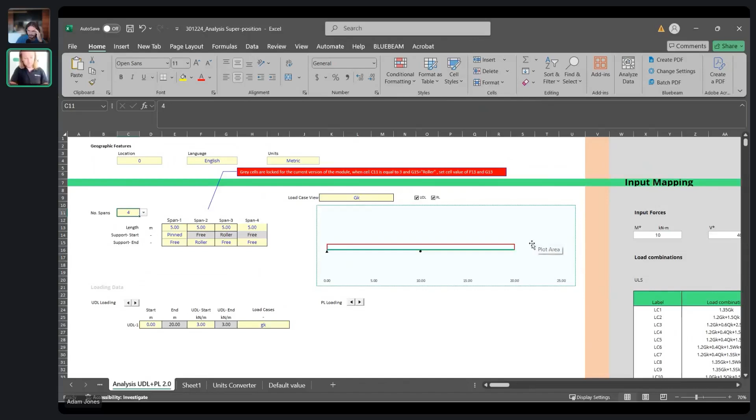We build Excel prototypes first, so you're going to be able to put in the span length, free, pinned, and the types of support. Up to 4 spans, and this is from a while ago actually, December. So you do have 4 spans, free support both sides, UDL, point load, and stack the loads like that. So that's a bit of what the UI will look like, and that'll be basically one drop down as well.

We've got a few more questions actually. This is awesome. I'll just get to you again, Faisal. We do have Red Stag in the software, so if you sign in in New Zealand, they're there. As a New Zealander, I'm obviously quite happy about that. And then we have a few anonymous ones. So this is a nice thing to say.

Yeah, Adam. Gotcha. So the DAOs right now have just simple connections, based on the New Zealand code, draft Eurocode and the existing Eurocode. There are 2 next steps. Step 1 is in 2 weeks, we're going to re-release the most popular 6 DAOs for a better user experience of just the simple connections, just actual loads, basically.

But in parallel, we're quite deep into building our moment connections out, and that will give you much more flexibility. To be honest, the user experience of our DAOs at the moment isn't the easiest to work with, I think. So we're going back to the drawing board based on a lot of our users and building really good moment connections, because they're the things that are quite difficult. Okay. Yeah.